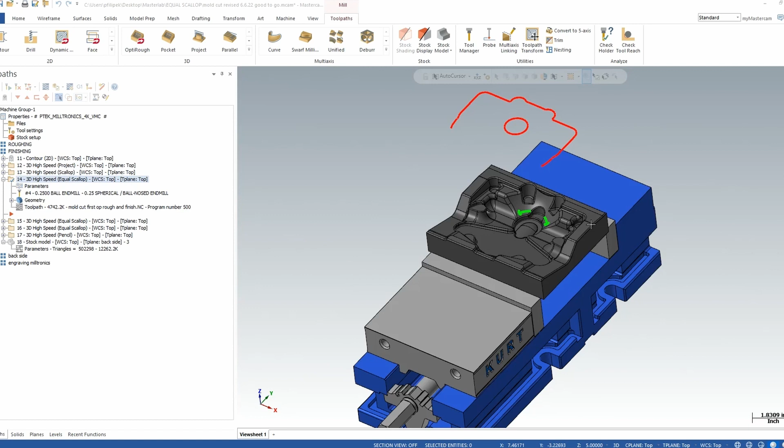Now on this part, you're seeing a mold. It's kind of a mold-based part, and what I'm really after is a certain finish where these green arrows are. I drew some green arrows on my screen because when I initially did this, I pretty much did a scallop without doing anything with the toolpath, where I had good motion, but not necessarily the motion I wanted where these green arrows are.

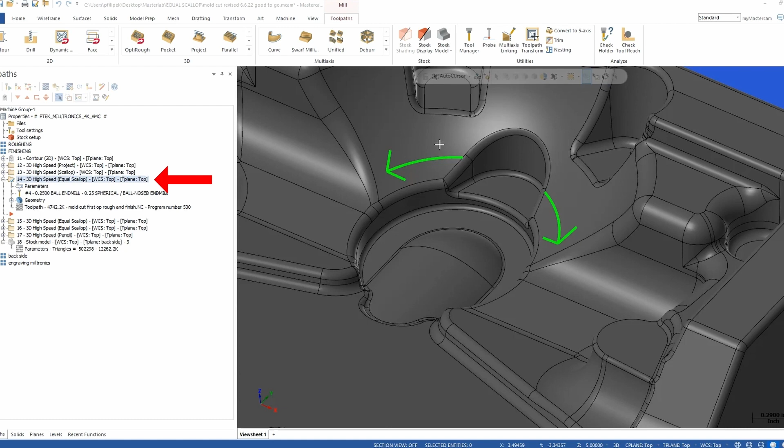So a cool way to do this is to go back into our toolpath, and in our toolpath control page, we have a strategy. We have closed offsets and trimmed offsets. The trimmed offset option allows me to pick curves if I want. In this case, I picked 2 curves, and I have those curves up on the screen. As you're noticing, I drew a circle, and I took a pattern off the top of my part for the outside shape. This is going to act kind of like a multi-axis morph toolpath, where it echoes both shapes together and blends them out.

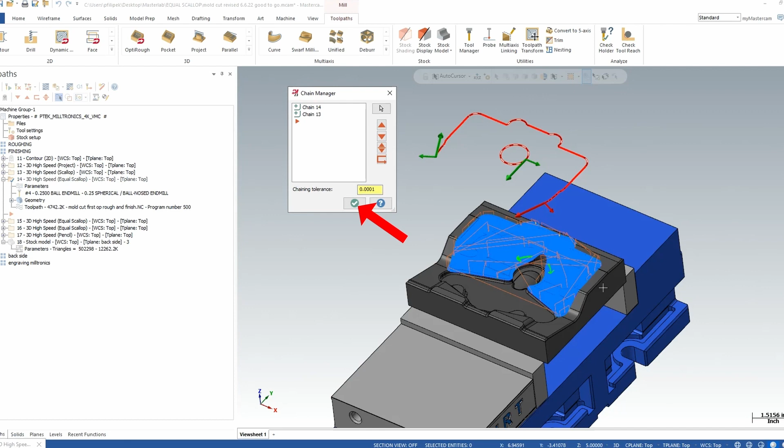What the circle did for me was give me the true pattern that I actually wanted around that area I pointed out with the green arrows. So let's take a look at that without our solid model on. Once I zoom in here, you're going to notice my lines are following the shape of that circle, which is what I was really after, to hopefully eliminate any polishing that would be needed.

Now it's easy to talk about this and say you can do this, you should be doing this. But what I like to do is really back it up with some actual machining video. So let's take a look at this actual part being cut in this machine behind me.

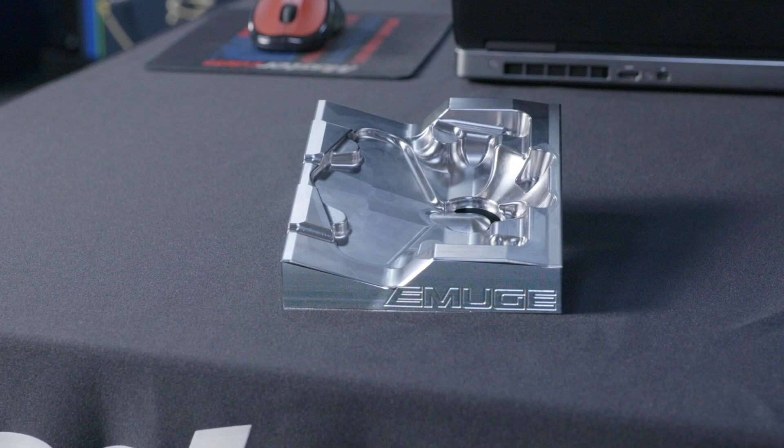As you can see by that video, we got some really cool chip formation from those excellent EMUGE tools in this P20 tool steel that's running about 37 Rockwell. You'll also notice that my cut pattern on my equal scallop was pretty much exactly what I wanted, because I had the ability, through Mastercam's high-speed toolpaths, to manipulate the cut the way I wanted it and not necessarily the way Mastercam wanted it.